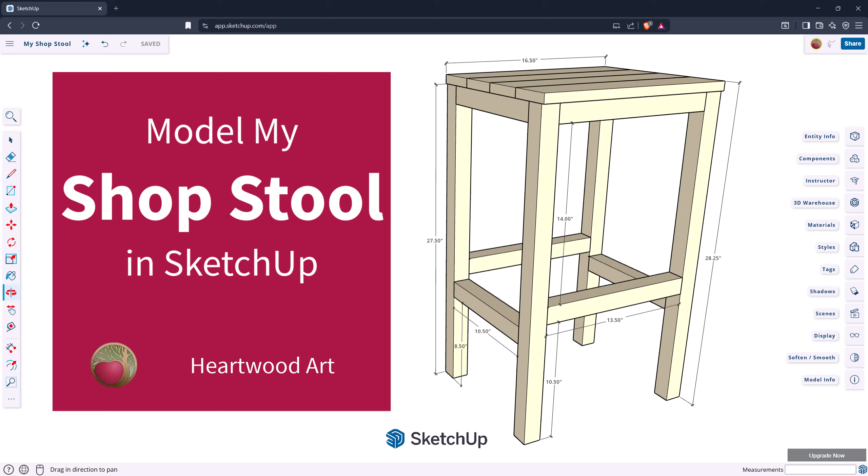Okay, let's dive in. Let's check our project dimensions to ensure we're both inputting the same lengths. In the top left, click the hamburger menu and then click App Settings. I've got mine set to decimal inches.

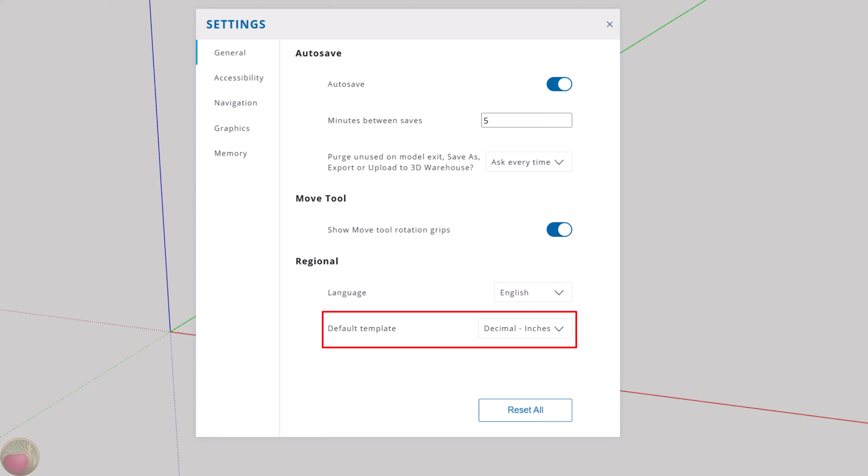Okay, let's close this, and let's create our 2x2 leg. Hit R for the rectangle tool. Let's start at the origin and click and draw it up and to the right. Let's input our dimensions of 27.5, 1.5. Hit enter. Let's zoom in.

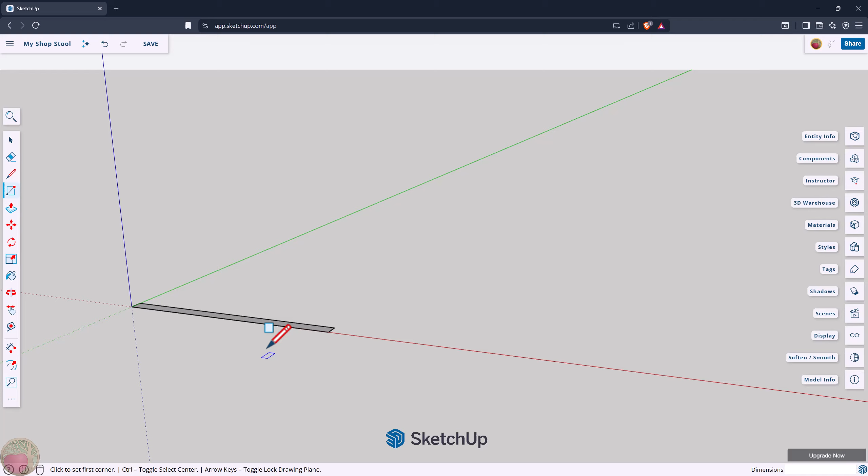Let's give it height. Hit P for the push-pull tool. Hover over the top face, click and drag up a bit. Let's input our dimension of 1.5. Hit enter. Now let's make it a component.

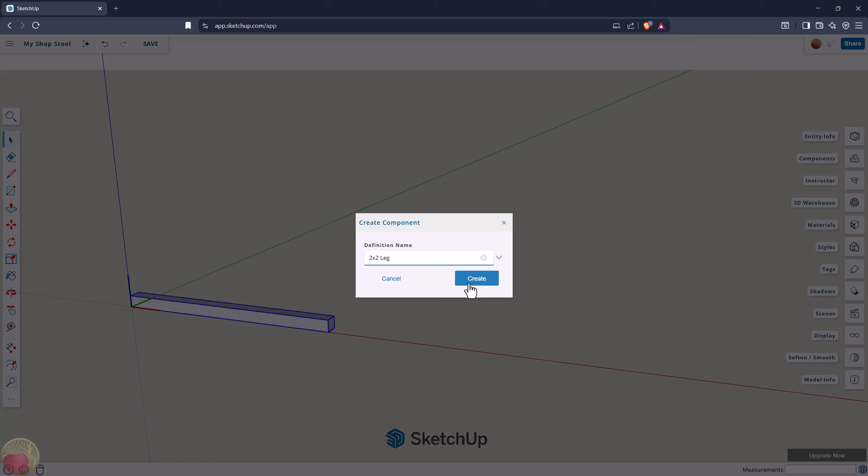Hit spacebar for the selection tool. Triple click. Hit G for the component dialog and input 2x2 leg. Click create. Now let's create our 2x2 stretchers.

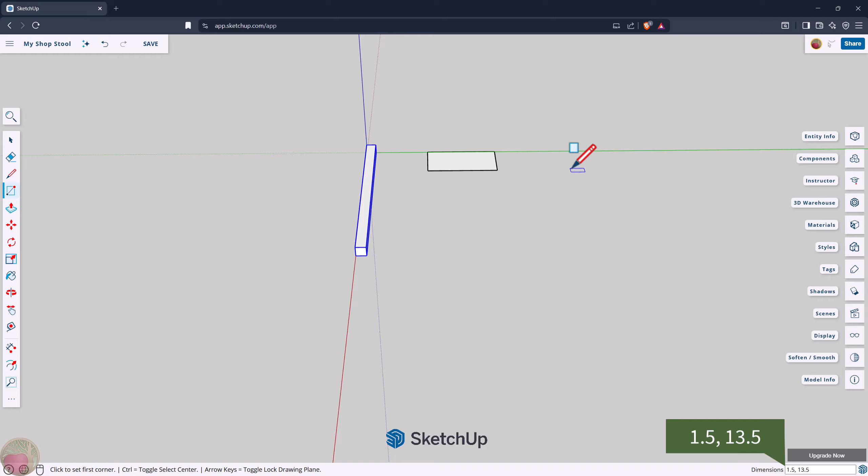I'm going to orbit around by hitting O, clicking and dragging around for a top-down view. We're going to create them on the green Y axis. So hit R for the rectangle tool. Get near the green axis, click and draw it out. Let's input our dimensions. Remember, you have to input the X dimension first, which is going to be 1.5, 13.5. Hit enter. Hit P for push-pull.

Click and drag up a bit. Enter our dimension of 1.5. Hit enter. Let's make it a component. Hit spacebar, triple click, hit G, and we'll call this 2x2 stretcher.

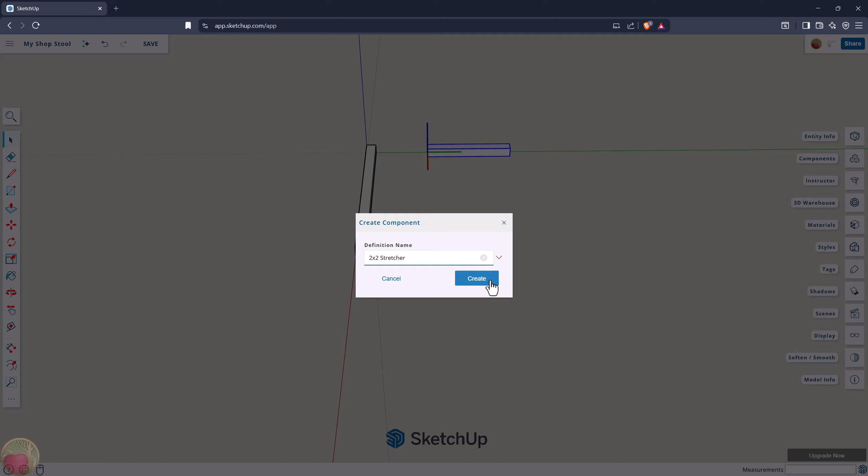Click create. Now let's attach this stretcher. I'm going to orbit around for a bit of a top-down view. Zoom in. Hit M for the move tool, and let's click and drag this top corner to the top corner endpoint of our leg.

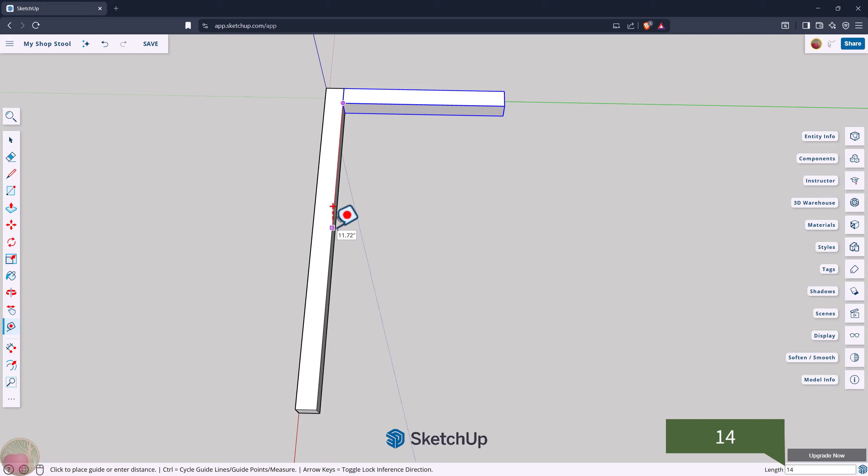Okay, now we need to measure for our bottom stretcher. Hit T for the tape measure tool. Click on the bottom intersection of these two boards. Let go of your mouse button. Draw it down a bit on that edge and type in our distance of 14. Hit enter. As you can see, that left a mark.

Now let's copy this stretcher. It's already selected, so on your keyboard hit Control-C to copy, then Control-V to paste. Move your mouse and you'll see it, and drag it nearby. Zoom in, and grab this top corner. Click and drag it to that guide point and let go.

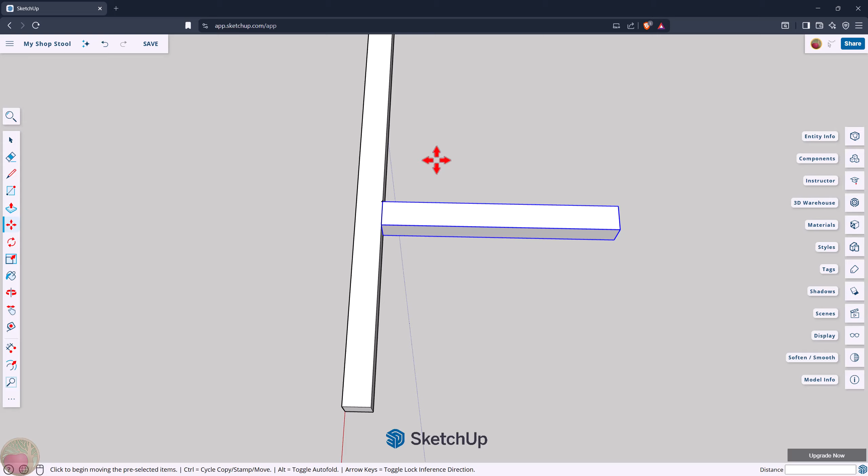Let's zoom out. Now let's copy this leg. Hit spacebar for the selection tool. Click once on the leg. Hit Control-C to copy, Control-V to paste, and move your mouse near to where it's going to go and click to drop it.

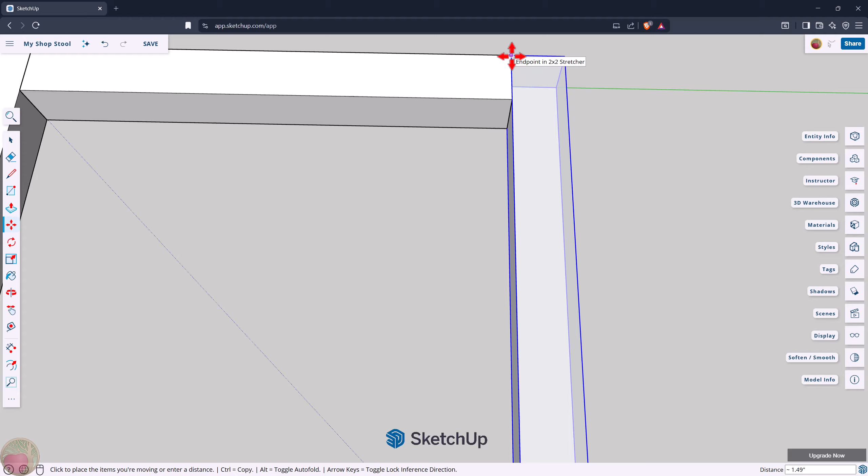You can zoom in there. I'm going to zoom in a little more. Grab this corner and attach it to the end point of our 2x2 stretcher. Now let's zoom out. We want to make this whole leg frame a component, so hit spacebar for the selection tool, click and drag a box all the way around it to select all of it. Hit G, and we're going to call this leg frame, and click create.

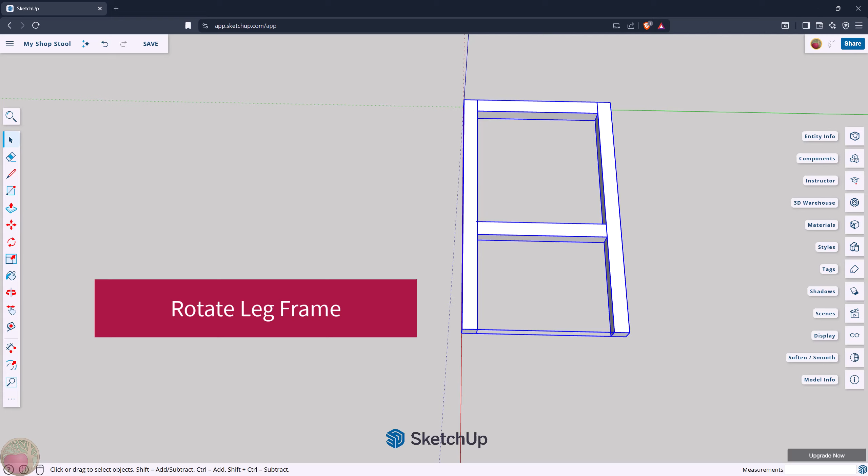Next we'll want to add our short rails, but that's going to be a lot easier if we rotate this frame on its side first. So let's move around to an end view, hit orbit, and click and drag up for an end view. I'm also going to right click, hit pan, move this over. It's going to be easier to see. And orbit again for a bottom view.

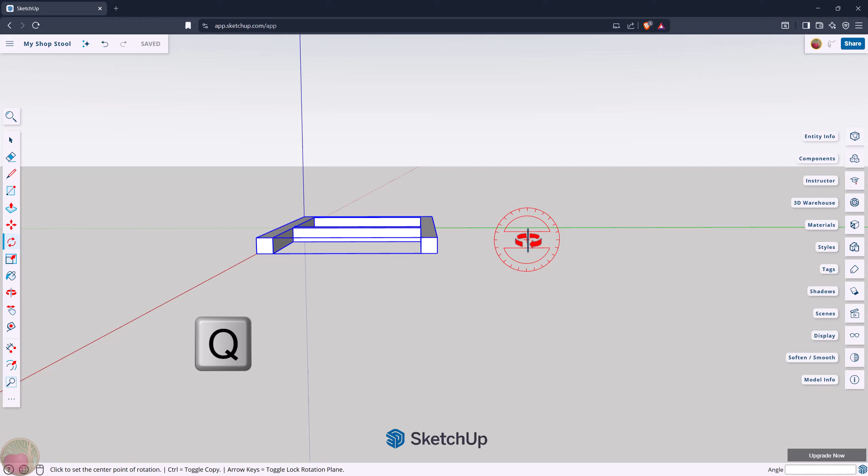Okay, let's rotate. Click Q for the rotation tool. Hover over this bottom corner until you have a red protractor. Click once there, let go of your mouse button. Move to the right along the green axis. Click once there, let go of your mouse button. Then move your mouse down and to the left. It will snap into place at 90 degrees. Click once to drop it there.

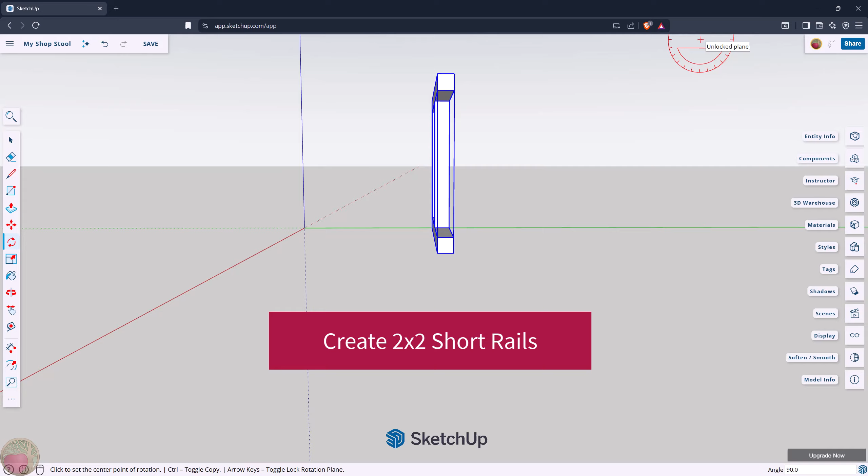Now let's make those 2x2 short rails. We're going to do this on the green axis, so I'm going to hit O for orbit. Give us more of a top-down view and zoom out just a little bit. Okay, hit R for the rectangle tool, get near the green axis, and click and drag out.

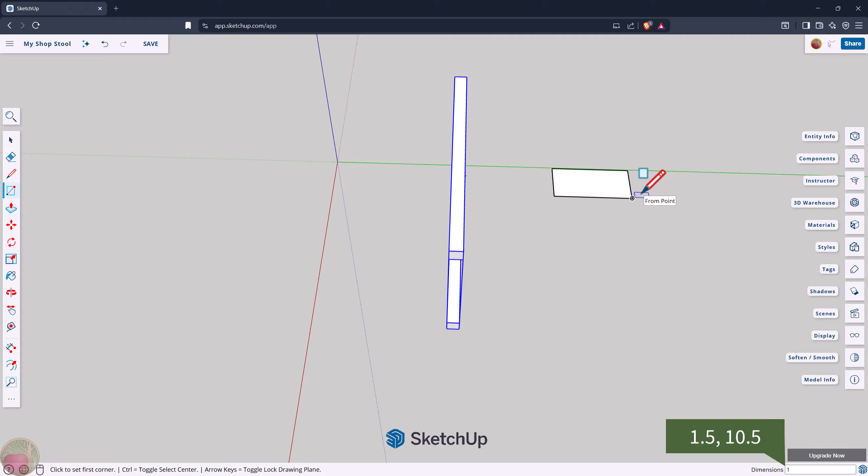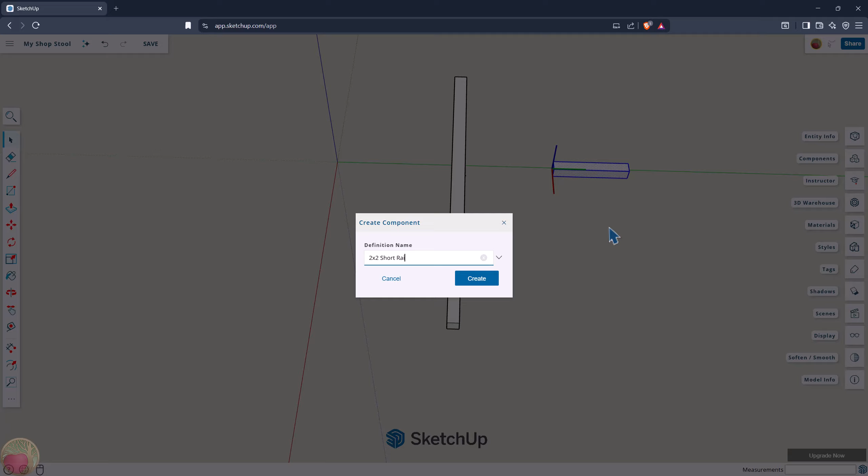Now let's input our dimensions, and remember to put in the X dimension first, which is 1.5, comma, and then 10.5, and hit enter. Hit P, click and drag up just a bit, input our dimension of 1.5, hit enter, and make it a component. Hit spacebar, triple click, hit G, and we're going to call this 2x2 short rail, and click the create button.

Now we need to attach the rails to the leg frame, and honestly this is going to be easier from the other side, so hit orbit and click and drag around to the other side. Let's zoom in there just a bit.

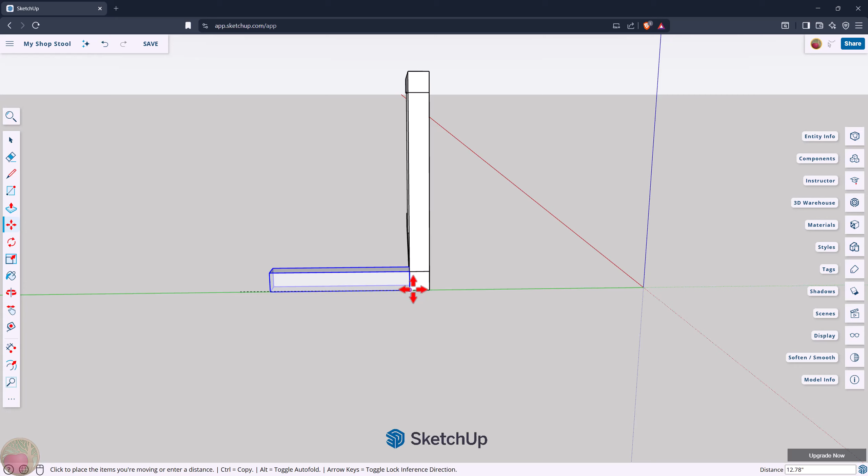Hit M for the move tool. Click on this bottom corner and move it in to the end point of the 2x2 leg. Now let's measure for that second rail. It's going to be easier from the other side, so hit orbit and flip around just a bit.

Now let's measure. Hit T for the tape measure tool. Get right on this corner intersection, click once there, let go of your mouse button, pull it down that edge a bit, and then type in our distance of 16. Hit enter. As you can see, that made a mark.

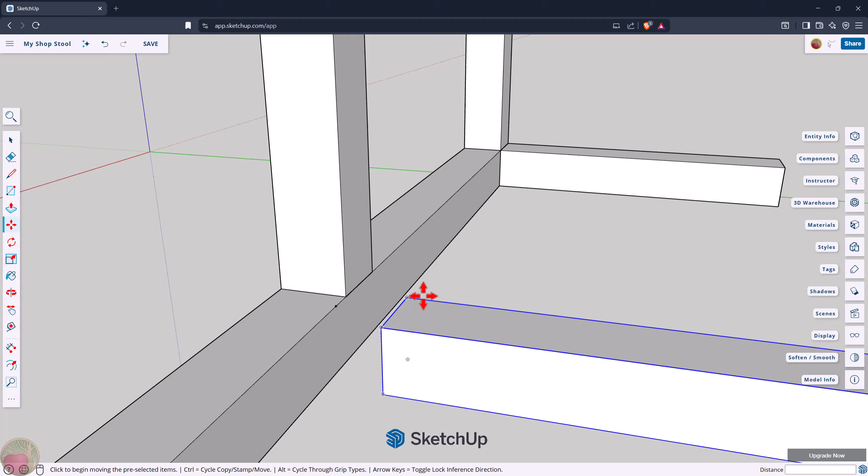Now let's copy this rail and place it. It's already selected, so hit Control C and Control V. Move your mouse and place it near that mark and click to drop it. Zoom in there so you can see, and this mark is going to be for the top of this rail. Click on that corner and move it to the guide point, and there it is. Let's zoom out.

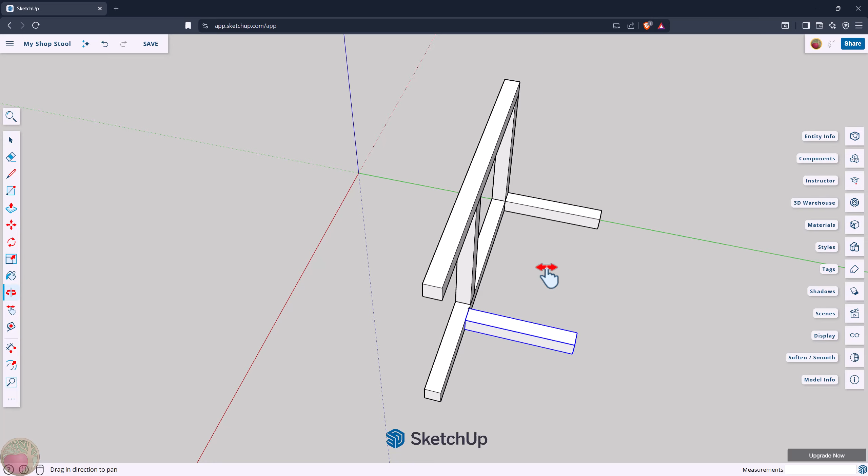Now we're going to copy both of these rails and place them, and it's going to be easier from either a top-down view or the other side. So hit orbit. I'm going to move this. Hit right-click and pan, bring it down. So let's select both of these. Hit spacebar for the select tool.

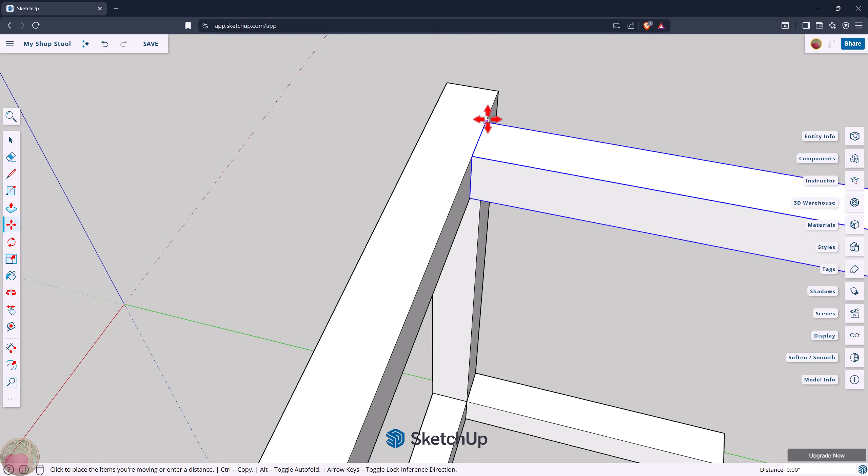First one's already selected, so just hold shift and click on the other one. Now hit Control C to copy, Control V to paste, and move up. You can click to drop it anywhere. Zoom in on this top and click on this corner and move it to the end point of the leg, and that will place both of them.

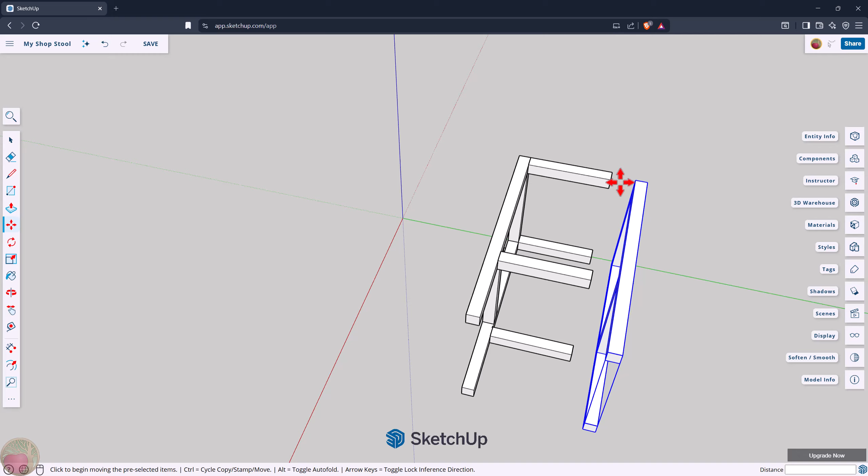Now let's copy this leg and place it on the other side. Hit spacebar for the selection tool, click once on the leg, hit Control C and Control V, move your mouse and place it on this side. Zoom in, and let's grab this top inside corner and move it to the end point of the short rail.

Okay, let's zoom out. We need to make this whole thing a component. So hit spacebar and then click and drag a box all the way around the whole thing. Hit G, and we're going to call this whole frame and click create.

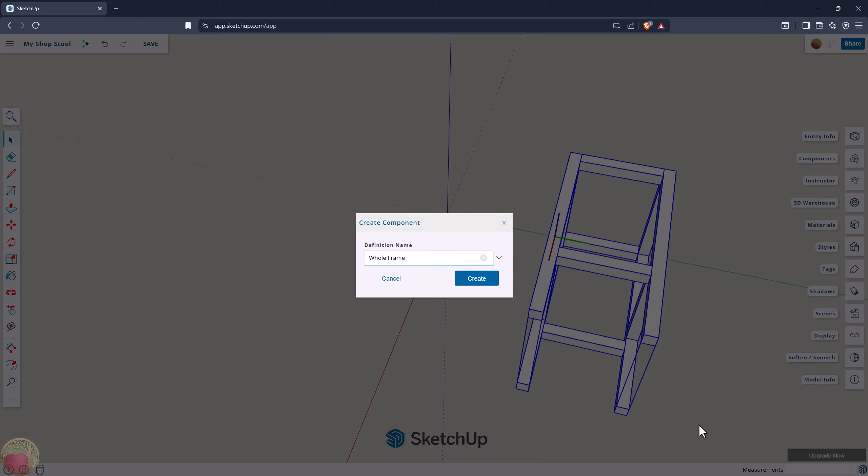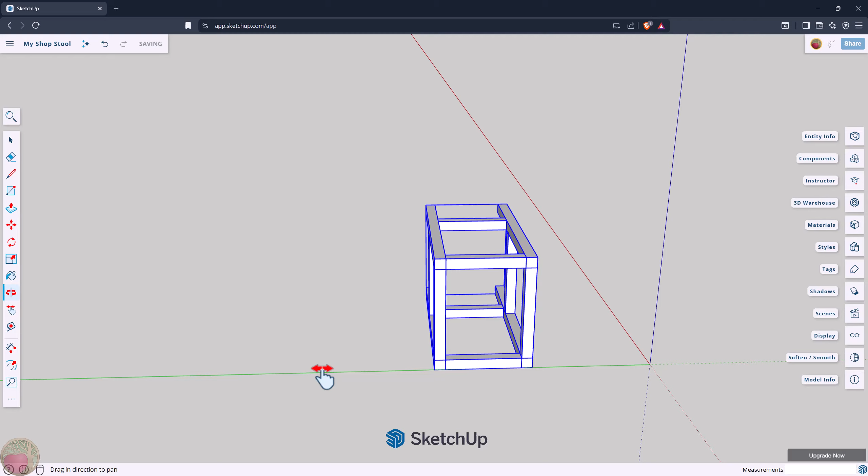Now we want to build our seat boards, and this is going to be easier from the other side, so hit O for orbit and click and drag around. Over here we're going to go for more of a top-down view and zoom out. I'm going to right click and hit pan and move this whole thing over because we're going to build it here. So let's create those 1x4 boards for our seat.

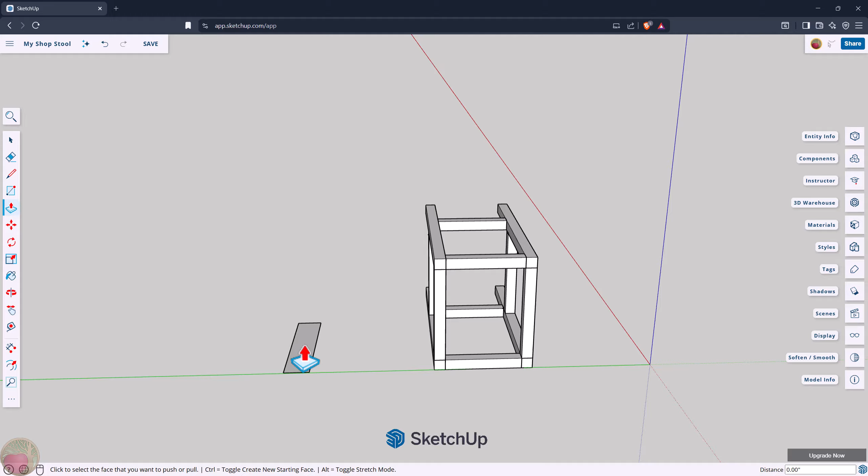Hit R for the rectangle tool. Get on the green axis and click and draw up. Let's type in our dimensions, and we have to put the X dimension in first, which is our length, 16.5, then comma, and our width of 3.5. Hit enter. Hit P, hover over the face, drag it up a bit, and input our height of 0.75, and hit enter.

Now let's make it a component. Spacebar, triple click, hit G, and we're going to call this 1x4 seat board, and click create.

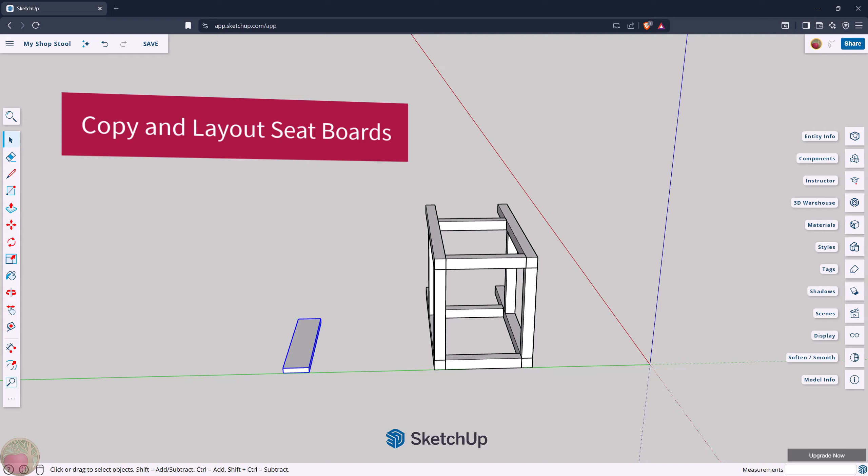Now we're going to copy this board 3 times and lay all 4 of them side by side. So let's zoom in to this area. I'm going to hit O, right click and pan because we're going to build it right here. Now that board's already selected, so just hit Control C, Control V, move your mouse, and you're already on the bottom corner. So just move it to the endpoint of the first board and click.

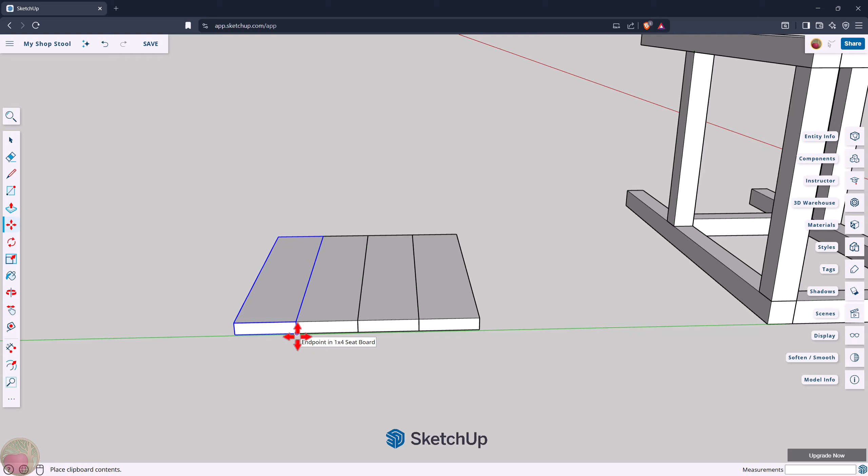Since this board's already on your clipboard, you only have to hit Control V to get another one. Move, you're already on the bottom corner. Move it to the endpoint and click, and then repeat one more time. Control V, move it, and put it on the endpoint, and click to drop.

Now, when you're building this in real life, you'll need to attach these boards to one another. I use 2x2s underneath, and we'll model those later. But you can use any method or board, like more 1x4s or pocket holes to attach one board to another, whatever you like. But we'll add those in a moment.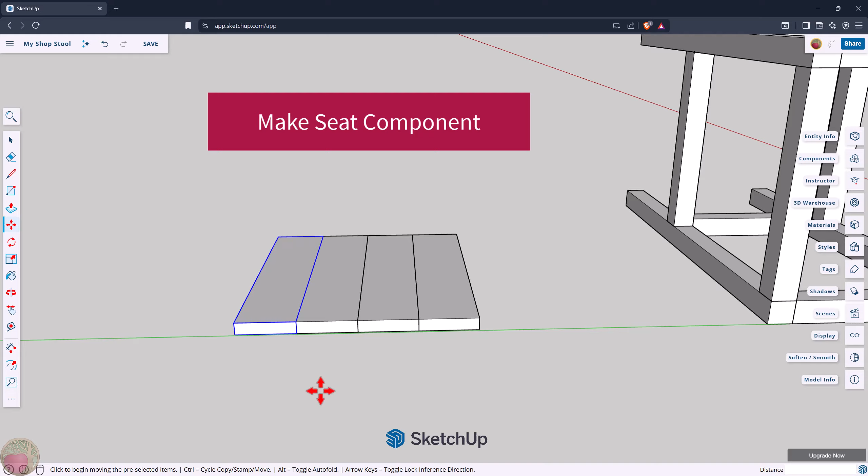For now, we need to make this whole seat component. So hit spacebar, click and drag a box all the way around it, hit G, and type in whole seat, and click create. To place this seat, it's going to be a whole lot easier to rotate it first.

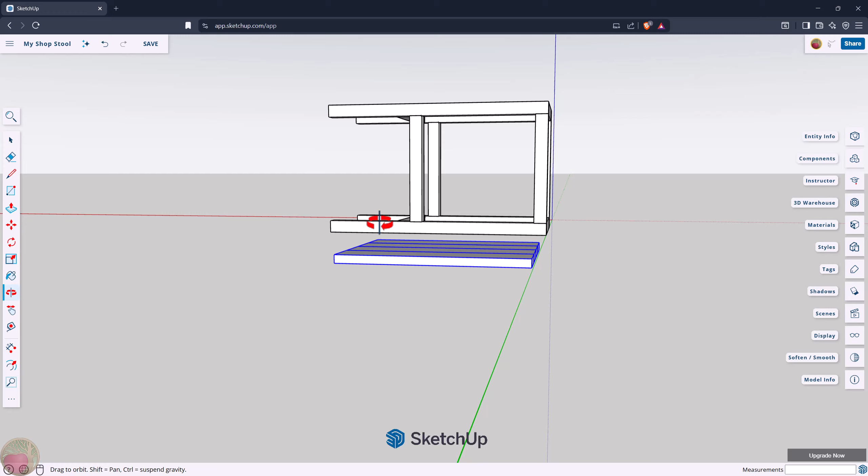So let's hit orbit, get a side-on view of this to make it easier. I'm going to zoom out just a bit. Okay, let's rotate. Hit Q for the rotation tool. Hover over the endpoint on the bottom until you have a green protractor. Click once there, let go of your mouse. Pull it out to the right just a little bit, and click once there.

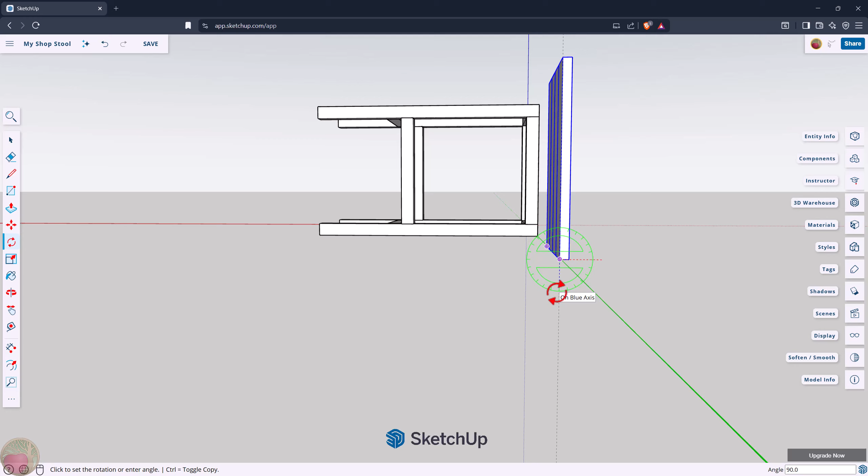Let go of your mouse and move it down into the left. It will snap into place at 90 degrees. Click once there to drop it.

Now for moving it, we're going to have to place it twice. We'll put it over there and then we'll center it. I'm going to orbit around a little to make this easier. Hit M for move, click on this bottom corner, and just move it mostly into place. Doesn't matter if it's exact.

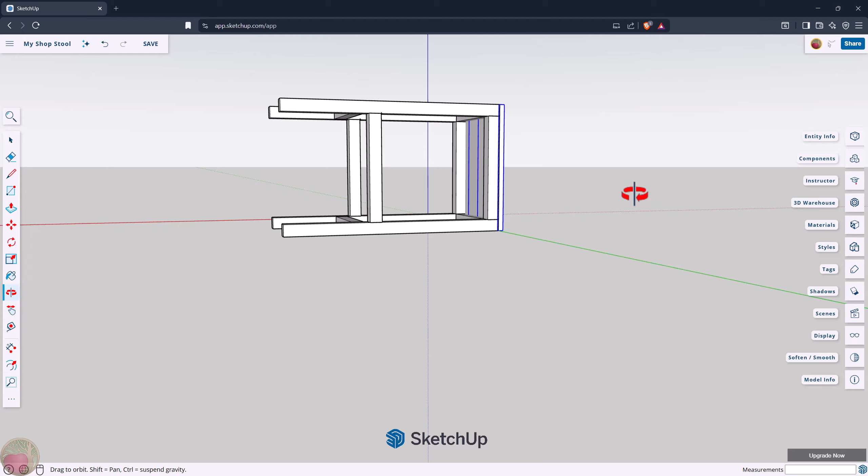Now let's orbit around to a top-down view so you can see why we need to center it. These boards are just a little bit longer, and you can see it's off-center over on the right. I wanted a bit of a lip on the boards to help me move the stool.

There's a trick to centering this thing, and it's super easy. I'm going to zoom in a bit, hit M for the move tool, grab this anywhere and just pull it back a little bit.

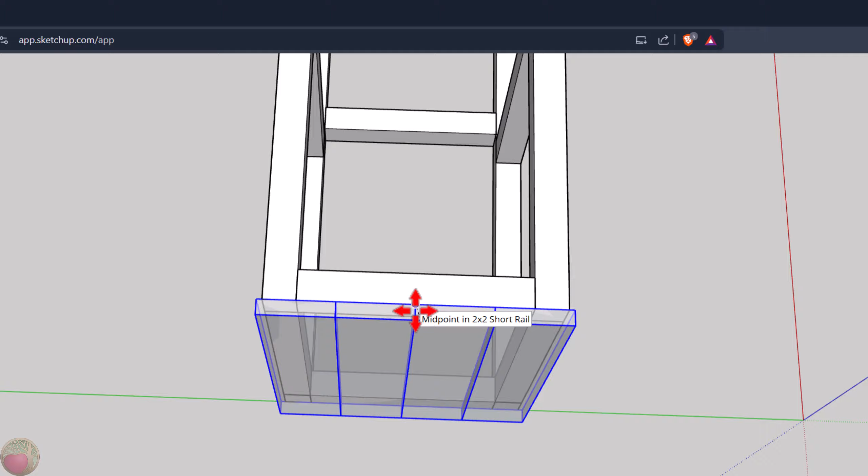Now hover over this rail. You can see it has a midpoint; you may need to go up and down it to find it. The boards have a midpoint too on this component, right between the two middle ones. Hover over that, click and drag until you hit the midpoint on the rail.

Let go, and now it's centered. Now it's flush on the other two sides, so it's fine.

Okay, let's make those seat supports. Now I'm going to orbit around, hit O, move around and zoom out. Let's have a look at this inside, and I'm going to zoom in.

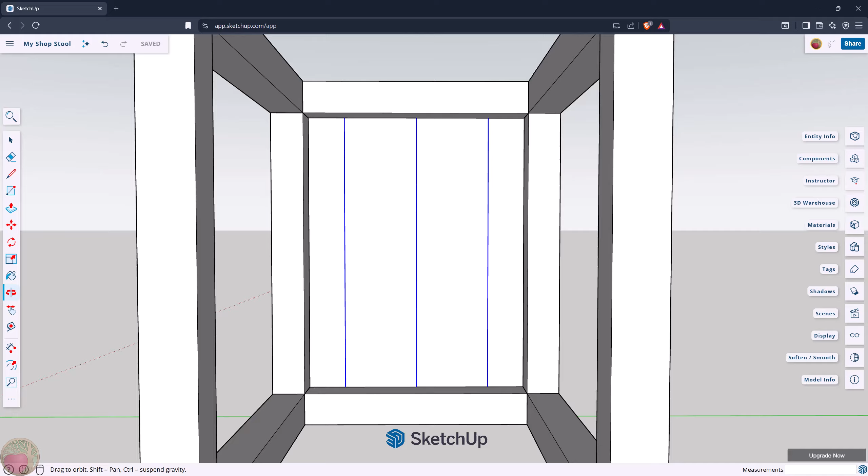So we need boards that go left to right, and I'm going to use 2x2s. Now they're the same length as our short rails, but I haven't had good luck trying to copy them out of this whole component, so let's just make new ones. I'm going to zoom back out and come over here to the green axis to make them.

Now I want more of a top-down view on this, so I'm going to orbit to that. Okay, let's draw that board. Hit R for the rectangle tool, get near the green axis, click and draw it out. Input our dimensions with the X one first, which will be 1.5, comma 10.5.

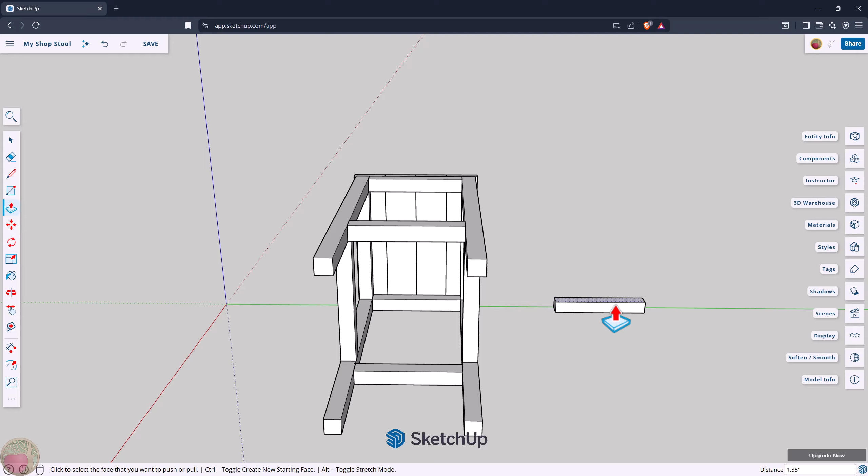Hit P, click and drag it up a bit, and enter the dimension of 1.5. Hit enter. Let's make it a component. Hit spacebar, triple click, hit G. We're going to call this 2x2 seat support and click create.

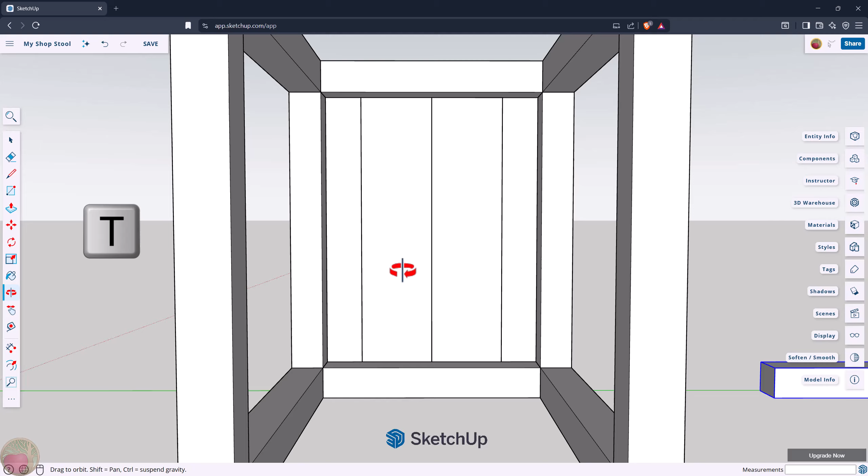Now let's measure for the placement. I'm going to hit O for orbit and zoom back into this interior. I'm going to place mine about 4 inches from the side. So hit T for the tape measure and click on this intersection of all 3 boards once.

Let go of your mouse, drag it up a bit, and then enter your distance of 4 inches. Hit enter. Let's do it on the other side: click on that intersection, pull down a bit, enter your distance of 4 inches, hit enter. Now we have our 2 marks.

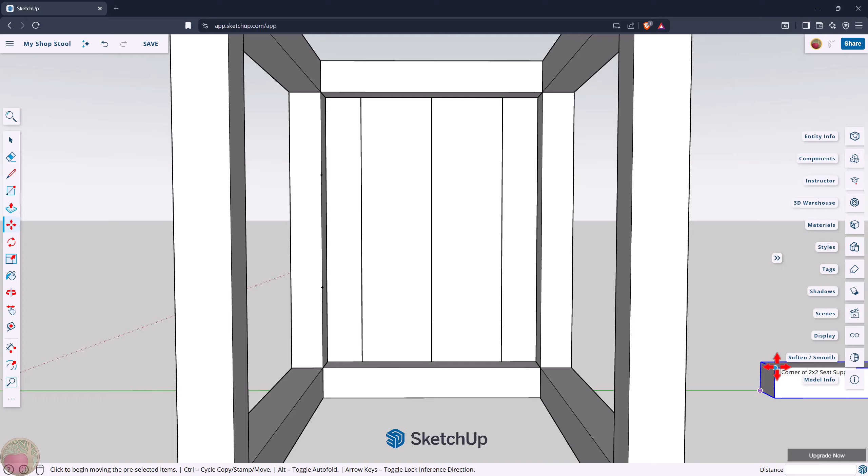Let's move this in. Hit M for the move tool. I want this for this top corner, so I'm going to click and drag on it until it gets to our guide point. It's already selected, so let's copy it. Hit Control C and then Control V.

And I already have that point on the edge. No, I don't. ...and click there to move it to the guide point.

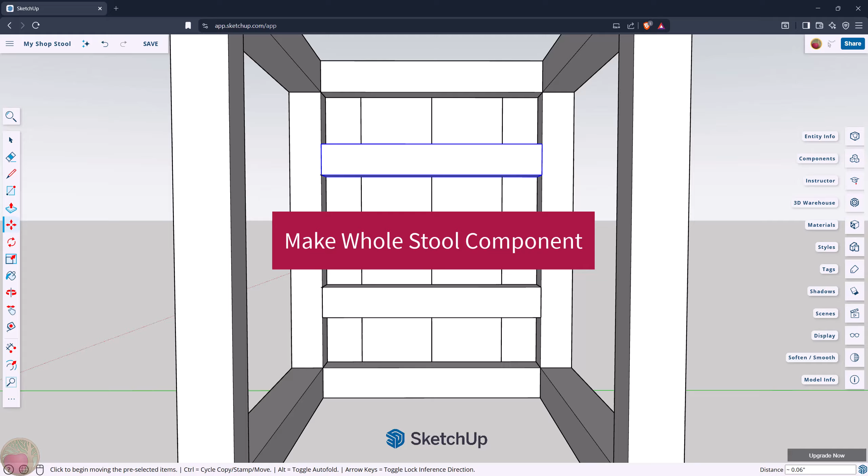Okay, now we need to make this whole thing a component, so let's zoom out. I'm going to orbit up so we can see the whole thing and zoom out. Hit spacebar, click and drag a box all the way around it. Hit G and call it whole stool, and click create. Now let's stand our stool upright.

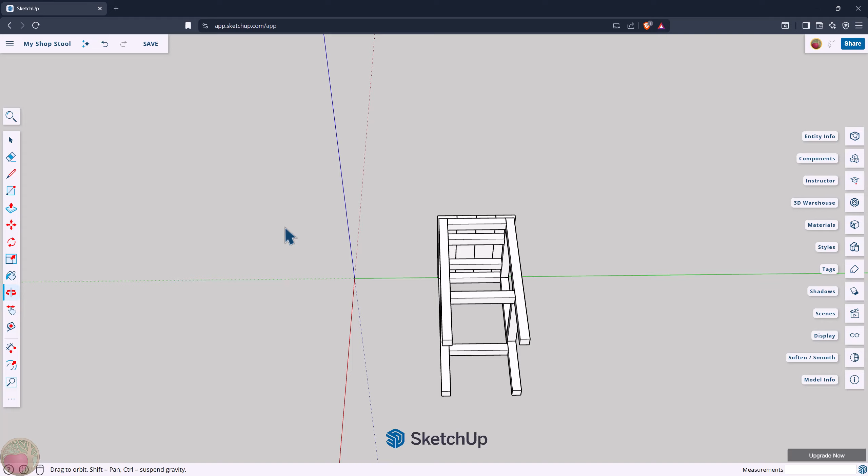I'm going to orbit around. A front view is just easier for me. Okay, hit Q for the rotation tool. Oh, it's being a booger. I'm going to zoom in.

Hover over the endpoint there until you have a green protractor. Click once there and let go of your mouse button. Move to the right along the x-axis, click once there, and let go of your mouse button.

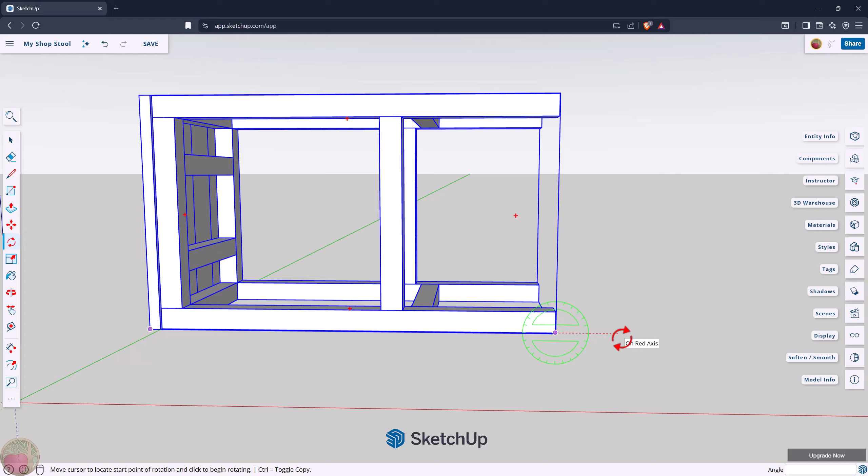And move your mouse down and to the left. It will snap into place at 90 degrees. Click once there to drop it. Let's zoom out a bit.

If you want to move it back to the origin, hit M for the move tool, get this bottom endpoint, click and drag it to the origin. Okay, let's orbit around to see it.

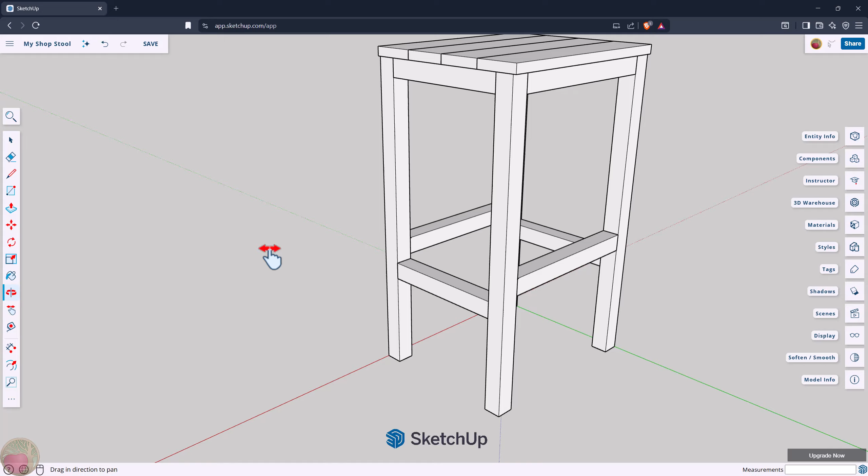Yeah, that looks pretty good. I'm going to right click and pan and bring it down a bit, zoom in, and maybe orbit just a little more.